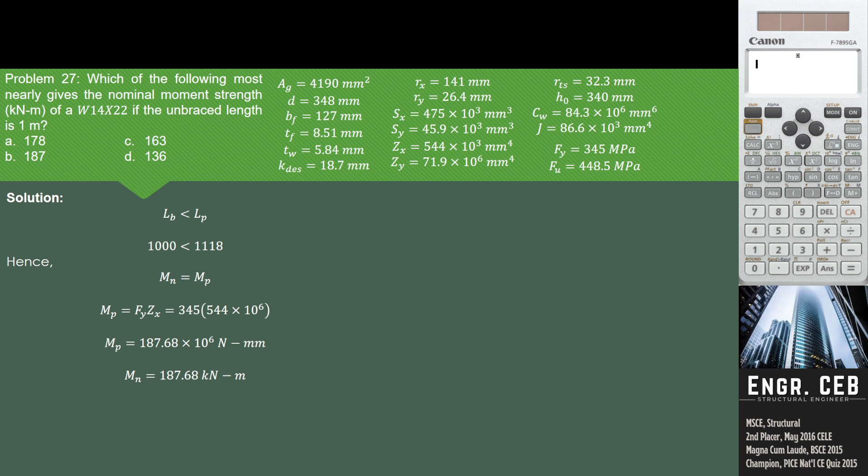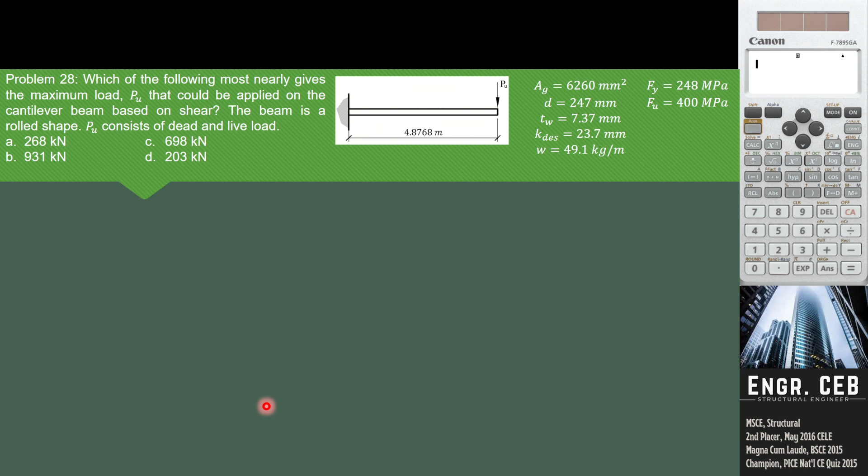Next, which of the following most nearly gives the maximum load Pu that could be applied on the cantilever beam based on shear? The beam is a rolled shape. Pu consists of dead and live load.

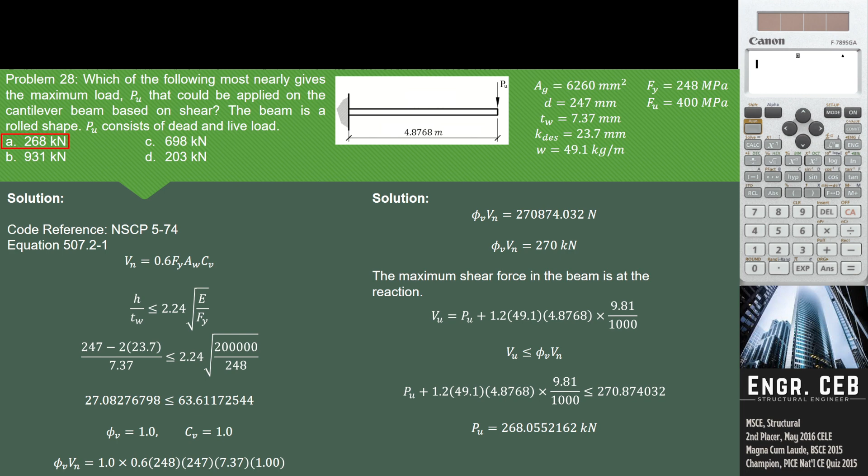Next, which of the following most nearly gives the maximum load P sub U that could be applied based on bending strength? Okay, so based naman sa bending strength, kailangan makompute natin yung bending strength ng ating beam. We check the compactness of the flange and the web.

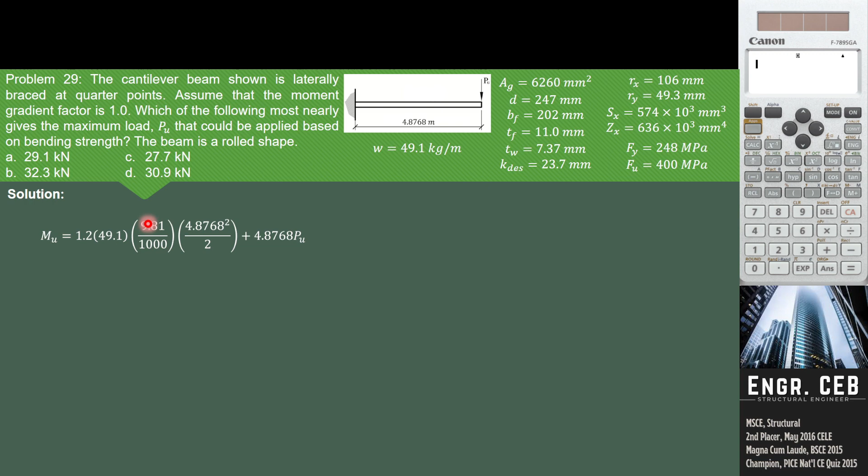Tapos yung moment due to the factored load is 4.8768 times PU. So, i-equate lang natin yung na-compute nating moment strength. But do not forget na kailangan pa natin siya i-multiply ng resistance factor kasi nominal pa lang siya. So, with this, we can now compute P sub U, and that is 27.7 kilonewton. And that is letter C.

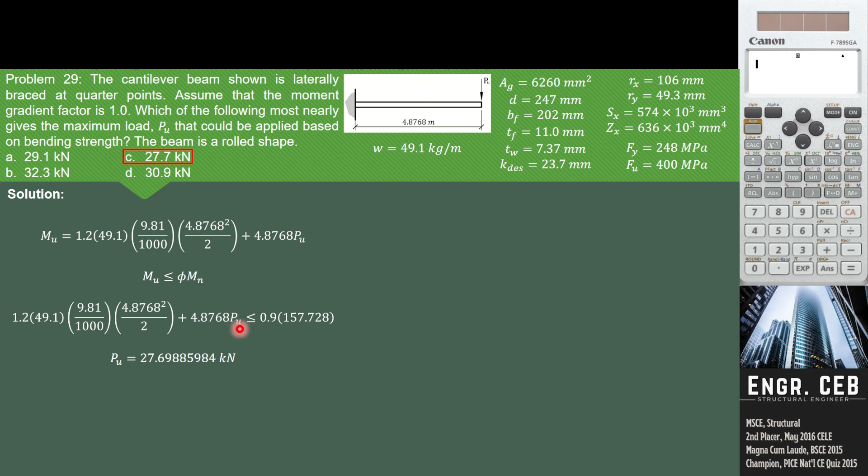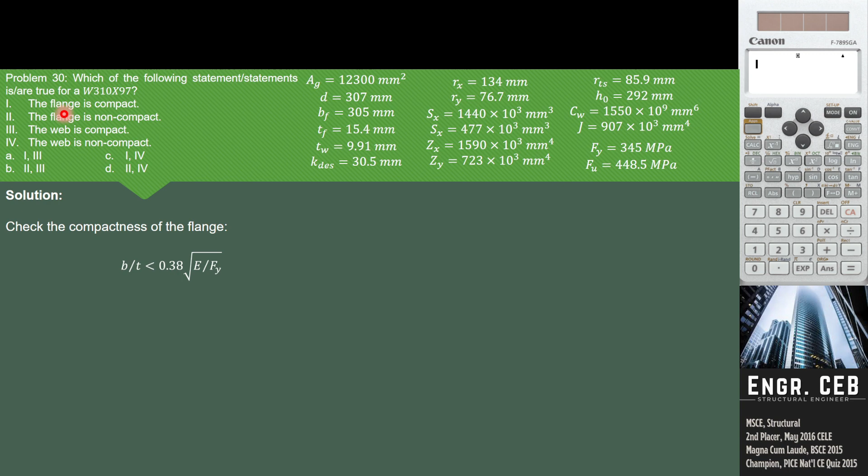Which of the following statements are true for a W310 by 97? So, kailangan natin ma-check kung compact ba yung mga flange at web kasi kung makikita nyo, yung mga statements dito is about the compactness of the flange and the web. Check the compactness of the flange. B over T, compare natin sa 0.38 square root of E over Fy.

Ang B is kalahati ng flange width. And then T sub F is 15.4. Compare natin sa 0.38 square root of E over Fy. So, ang mako-compute natin 9.90, greater than siya sa 9.14. So, it means na flange is non-compact.